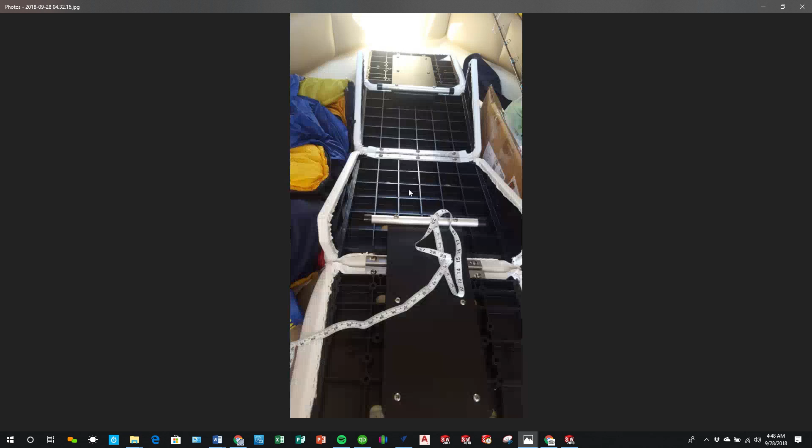So like I said, we're doing a live stream right now, trying to do a couple designs here, and thought it'd be kind of fun to show you this one that I'm working on. So it's a simple plate that I'm working on right now, but it's not just any sort of plate. I was actually contacted by someone that lives down in Marina del Rey, and on their boat, they are needing to replace, they're called Bayliner seats, and they recline and so forth, and so they wanted to get some brackets made for where the seat goes, and that's what you see here on these pictures.

And so they sent me some information on it, and I'm checking it out right now, and wanted to see if we can get a design done tonight, or I should say this morning, send it off to them and see how we're doing here.

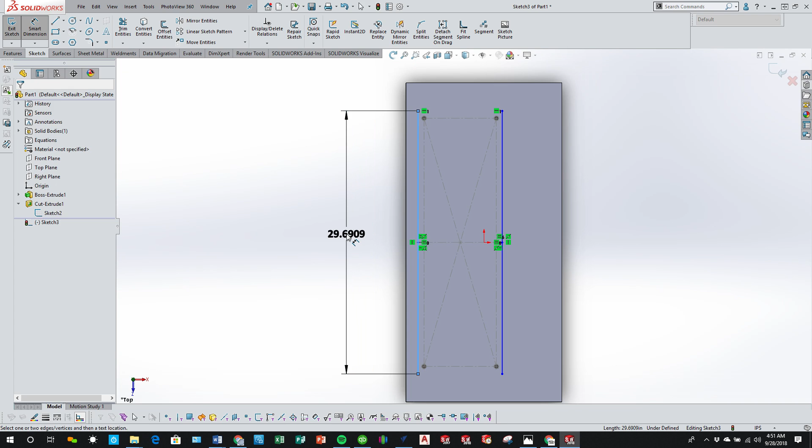So here we go. So what I did was I took that picture and kind of made my own holes on here, and what I'm in the process of doing right now is specifying that these guide rails need to be actually 30 inches, and with that, these are going to be the paths for my weldment profiles I'm going to be putting on here. It's going to be actually angle iron profiles.

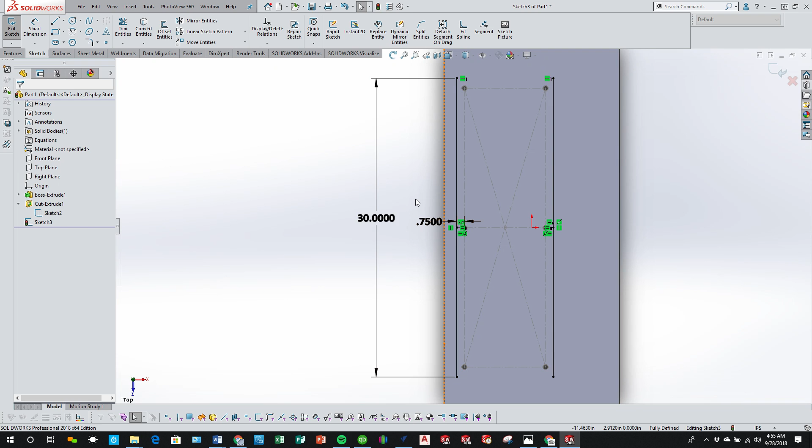So what I just did there is I made this center line and that center line equal to each other, and because I did that, I'm able to just put in a 3/4 inch dimension here, and that's going to fully define my sketch. I made those two horizontal lines based off the center of this vertical center line that was off of my cut extrude 1, and I gave it an overall distance of 30 inches. So we'll see how that works out for us, and we'll say okay to that.

So like I was saying, I want to do weldments now. And with our weldment, we're going to do a structural member. Let's do ANSI inch. And we want to do angle iron. And probably square ends. So the angle iron my client is specifying is 1.5 by 2.5. So let's see if we get something like that. There it is. Probably set up where it's 1/4 inch thick. Come in and grab that line there. That looks good. And with that, we'll say okay.

And what I'm gonna do next is just come in and I would mirror that body over, but it looks like I need to make it to where the plane that I would need to mirror about comes in the center. So before I mirror it, I need to come in and do a reference plane. I just simply click on that point there, and let's click on this face here. And what that's gonna say is, hey, make it so it's parallel to this face.

Now I could also come in and say, oh, I should probably make it so it's parallel to my right plane. That might be a better aspect to go, because if I ever come in here and change the face later, it might cause issues. As compared to doing it on my right plane, that is not going to change at all. So that's why I'm coming in and specifying right plane instead.

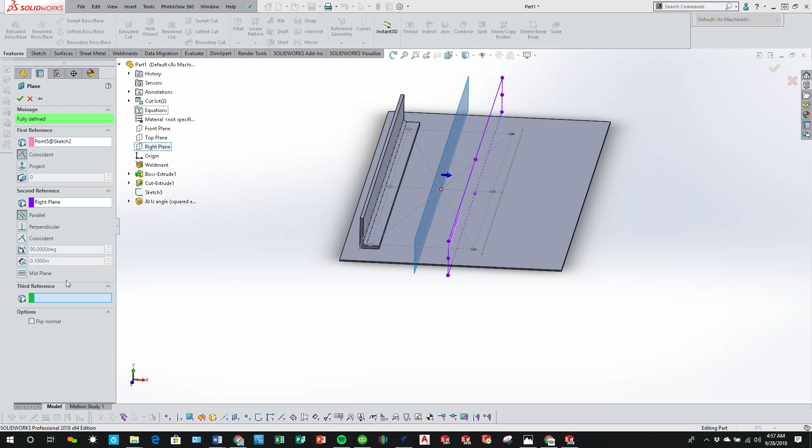Okay, so now that I got that plane there, simply come in and mirror. We'll go off of that new plane that I created, and we'll do bodies to mirror, and we'll select that body there. And we're done. Pretty cool, right? So looking at this, that looks pretty good. Not bad. So before, I just did that mirror just to verify everything.

Before I even do the mirror though, what I would want to do is come in and create holes on this angle iron. Just hang on really quick, just reviewing my notes for a second here. So I'm going to come in and do a simple cut on this, and we'll set it up to where they are slots. I might need to bump this over just a little bit more.

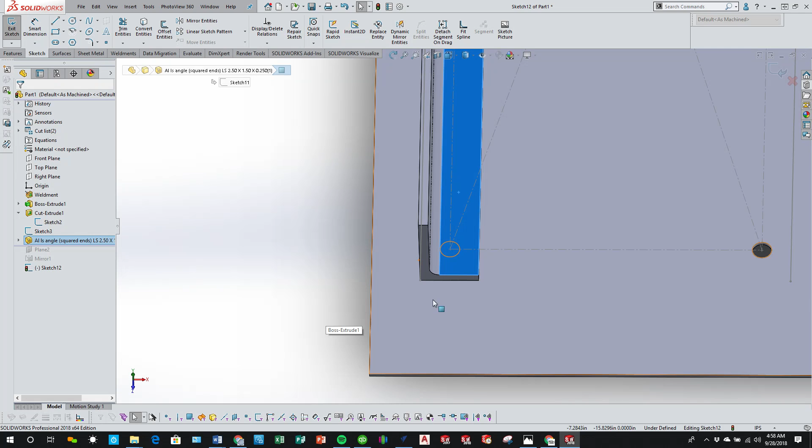Oh, that was a little loud.

My hole here, coming off from this edge here, it's 3/4 inch, and it's doing that over here as well. But I should probably bump that 3/4 inch just a little bit bigger. More likely, probably bump it up so it's 7/8 inch. There we go. It's gonna help center this over those holes a little bit easier.

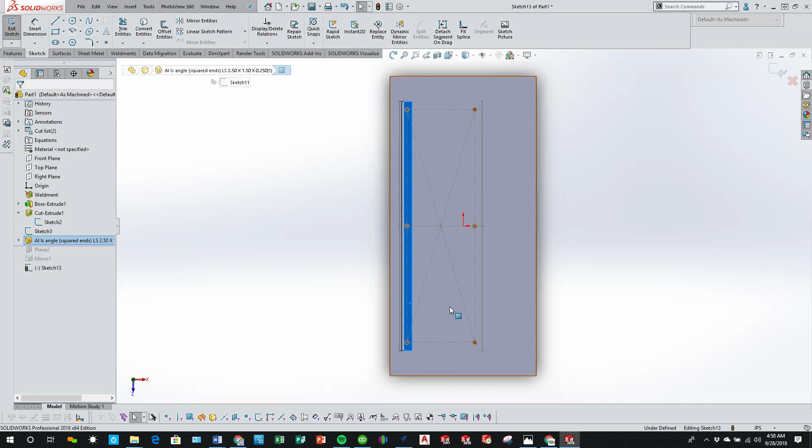And so now what I'm gonna do is come in, do a cut on this face, and we're just gonna do a simple slot. And with that slot, I'm going to come in and center it over this face here and do it kind of like that. I'm just oversizing the slots right now so that way I can come back and grab it a little bit easier.

But I'm going to come in and make every single one of these slots equal to each other. There's no need to make them different, right? So we'll just say equal slots. And size of them does not need to be that big. So what I'm going to do is simply come in, do a smart dimension, and we'll just say from there to there, we'll just make it so it's 0.75. Once again, it's just there to kind of help the assembly process.

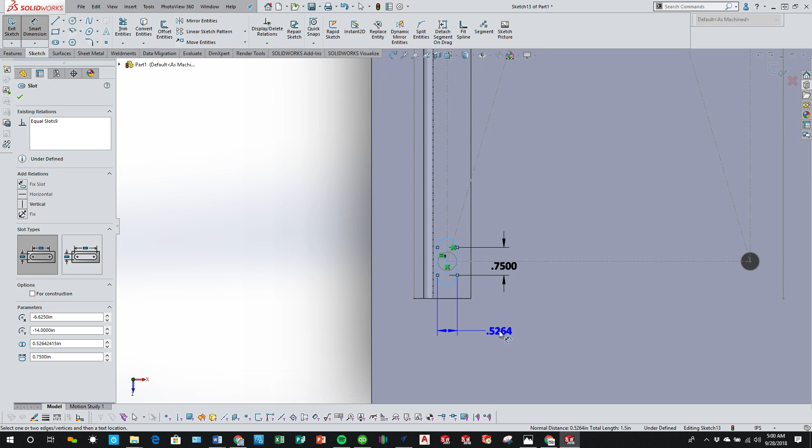Probably would be able to get away with not having to do slots, but you know, when I'm not on site and seeing what the true parameters are, and I'm working with components that I'm not seeing in person, I like to give little slots, and the client can come back and say, hey, those are a little too big, or so forth, and we can update that as needed.

So part of the fun of pulling an all-nighter designing and so forth, I am also running, like, I'm at my home office right now, and we got a tabletop 3D CNC carving machine, and currently I am running a program on that CNC machine, and it's coming through and cutting slots. It's kind of fun. We're making wooden letterboards for a company, and I got to make 120 of these, and roughly it takes about 50 minutes per board on the machine. So yeah, I gotta basically run that machine 24 hours a day to meet our deadline, because I gotta turn it in about 15 days, I want to say. And so yeah, I am so blessed and thankful for this, but man, we got our work cut out for us right now.

All right, so going back to this, what I wanted to do is say 0.5 plus 1/32. Okay. So now all these slots are fully defined. So remember, I did that mirror function first, right? I'm sorry, before I get into going back into that mirror, what we're gonna do next is we're gonna do cut through all. Now, you might be thinking, well, if you cut through all, it's gonna cut through this bottom plate, right?

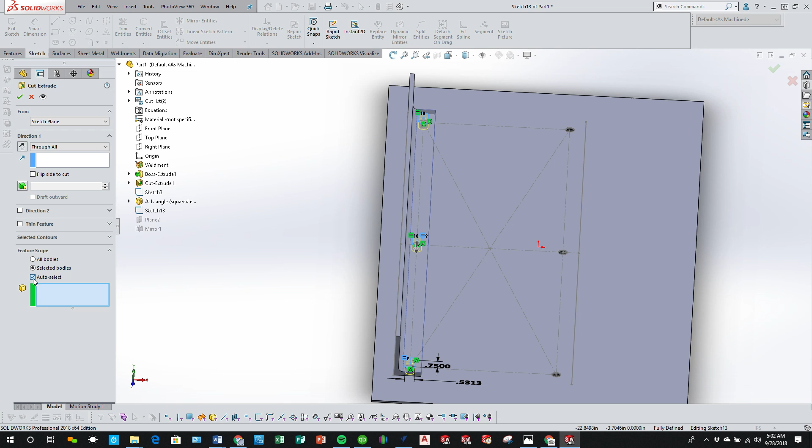And part of the reason for that is something like this. I want to have these slots, and I want to have them cut through this angle iron, but not this bottom plate. So whenever you have multi-body design, you have feature scope. And within feature scope, you could come in and say, hey, I just want to cut through that body alone and nothing else. And so when I say okay to that, and I'm saying through all right now. So when I do that, you'll still see, oh, look at that. It only cut through this one body. So that's what I generally like to do.

All right, so now that we got that, check out what happens when I go back to my mirror function. So I'll bring in my plane again, bring up mirror. Because I put the cut before the mirror, it now includes that. Because whenever you mirror bodies, it includes everything that's a part of that body.

So if you're not totally familiar with the strategy of how SolidWorks goes, you have a sketch. So you always start off with a sketch, no matter what. That sketch then gets absorbed into the feature. And features come in together and make up bodies. And those bodies can then make up the part file. And so that's kind of how the structure of SolidWorks goes, and that's how the design tree can also help you out as well. So because I got it set up with multi-bodies, you'll see also I have a cut list because I applied a weldments function. So now that we got that set up, it's looking pretty good, not bad.

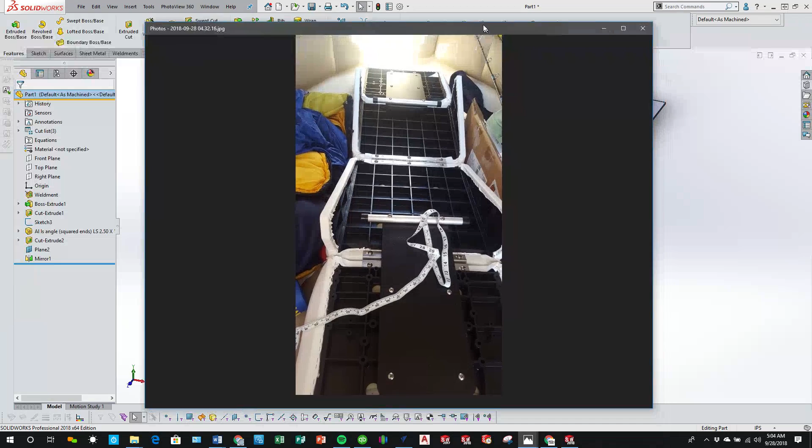So the next thing that I need to do is come in and make it so that, I'll pull the picture over here so you guys can see it again. So the type of seat that's gonna sit on this, it's a seat by Wise. They're just called Wise, and so they make seats for like marine applications, golf carts, industrial applications. So this given seat is actually a Wise Bayliner Capri series. And so what it is, it's a back-to-back lounge recliner seat. And so I'll just show you on their website right here.

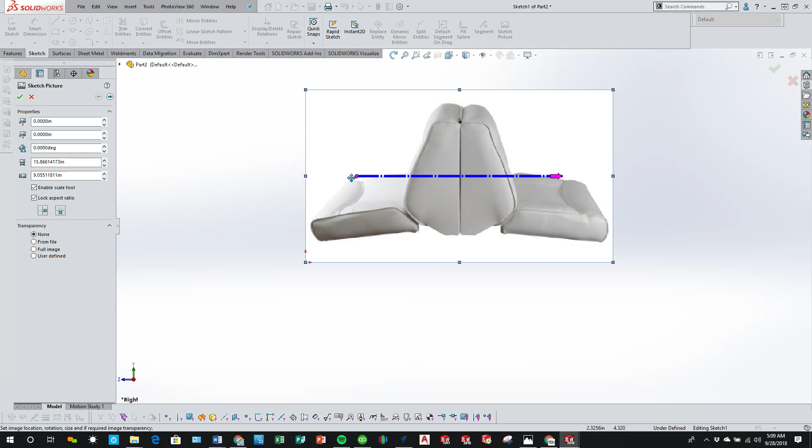So on their website, they say that the height of this is 19 inches, width is 20, and depth is 46. So seating depth is also 16. So I'm gathering that from here to there, 16. But what I want to look at is our height. So I'm going to say from here, and we'll say vertically up to there, and we'll call that out at 19 inches.

So what I just utilized was my enable scale tool, and what that does is it will take a line there, and you can rotate your image if you want to, but what it is, I took it to the bottom, brought it up to the top, and said make that line 19 inches. Pretty cool, right? So I'll come in here, I'll just make it so that this is about centered and say okay to that.

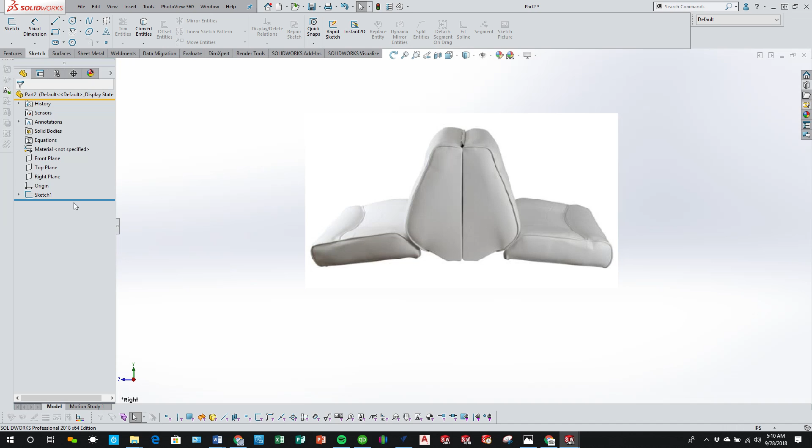All right, so what I want to do next is come in and trace this and make my first seat cushion. Okay, so whenever I do sketch picture, I always do that in a separate sketch feature than my actual extrusion. So now that I have that sketch done, I'm going to come in on my right plane again, create a new sketch, and I'm not going to be very accurate with it. I'm just going to come in and say from there to there. You know what, we'll do it this way. I'm still thinking as I'm going through it.

Now I'm looking at this going, you know what? We need to make this into a true assembly file. So what I'm going to do is make this the back one part file, and make this another part file. So we'll do that. I'm just kind of getting it close. My biggest thing that I needed was make this so it's 19 inches, like that. Cool. All right, so now we'll come in and trim this. We'll do power trim application.

See how my machine's going. So it's almost done. Oh, I'll wait till that's my end line when it comes over that way. So it's not done yet. It's probably got a couple more passes to go.

Okay, so now we have that. I'll just go in and fully define this. We'll say that that's at 4. And I just heard my machine die down, so that means that it is done. So that's at 4. We'll say that this guy here is at 14. And this one will be at 5. Great. But we're still not fully defined. Why is that? It's because of this line up here. We'll call that out at 4.5. Cool. So now we got that.

I'm just going to take that sketch and do a feature, boss extrude, and we'll do a mid-plane application. And with that mid-plane, the width of it is 20. So we'll just say 20 on that, mid-plane, done. Cool. So now that I have that, click save. And I'm saving this over onto my other screen for a second here, as you hear me clicking away. All right.

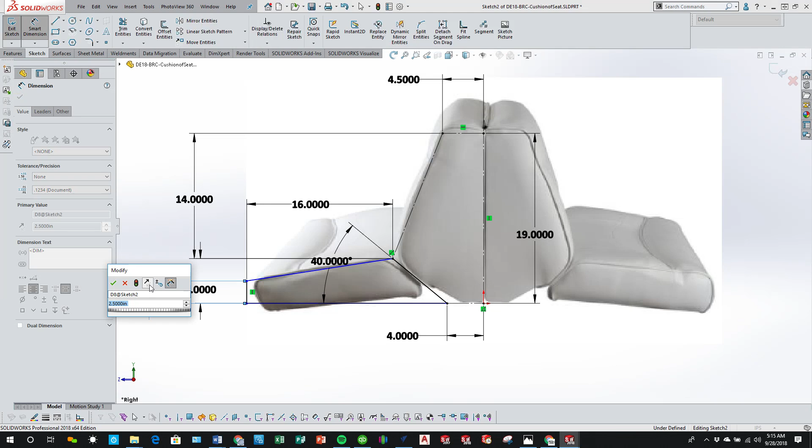I believe that this was 16, the seating depth. So let's see what that looks like. Looks like that. All right, and we'll give it a little more thickness in that. It's probably more at the 2.5-inch thickness, and we'll tell it to be horizontal. Yeah, once again, it's blocky. It's just meant for representation of the seat cushions. So we'll say that it looks good, and we will simply click save on that.

And I'm going to hide this picture. Great. So Control Tab to go back to my original one. We'll hide that one too. And now what I'm going to do is save this. We'll come in and do a new assembly here. So I'm going to actually go off of my seat cushion, make assembly from part, like so. We'll say cushion of seat, and we will lock that one in place. Now what we want to do is assembly and insert my next component in the back of seat. So because I did a save as copy, these guys are identical right now.

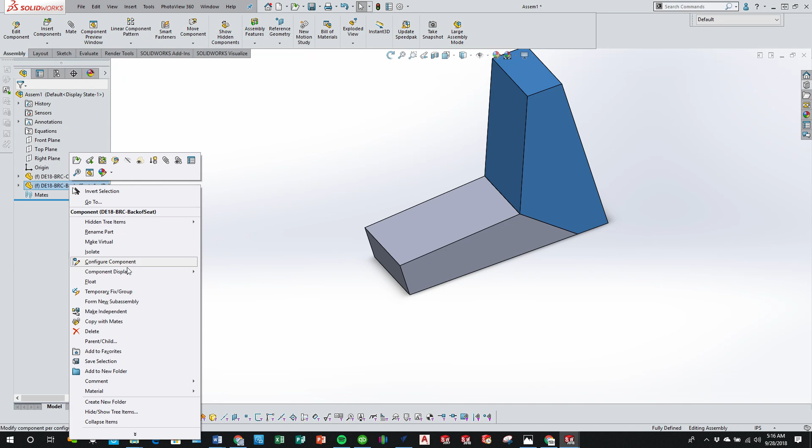Now what I want to do is make it so that this is, not flexible, but make it so that I can rotate it. So I want to make it so it can float. So I want to make it so that my right plane and right plane are coincident, but I still want this guy to be able to pivot, right? So what I want to do now is come in and say that this edge and this edge are coincident to each other, like that. Now what I can do is take this and flatten it out.

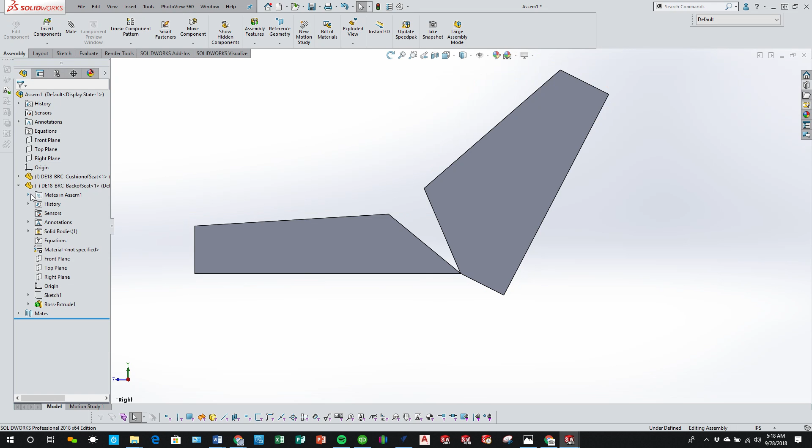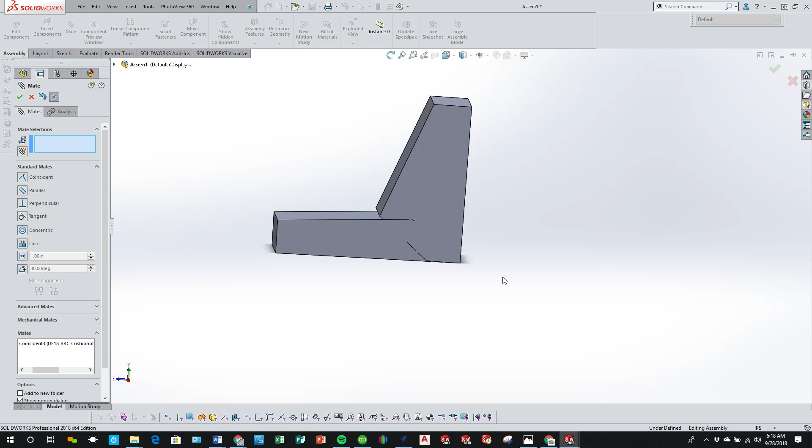So what we'll do is we'll come in, we'll make these two coincident, like that. And when it comes up, that should technically be vertical, like so. Okay, it should work. All right, so now I'll just simply take this, take it over, flip it over, and make these two guys coincident, because that's our hinge point. And we'll make my right plane and right plane also coincident. So now we can see that these guys are going to be coming out, and as this comes down, should be pretty good.

So now I want to check this one out. I want to take that, copy it over, flip it around like so, and same sort of application. I'm going to take this edge here and make it coincident to this edge here, like so. Yep. And we'll come in and we'll take our right plane.

Just realized our music died. Let's do that.

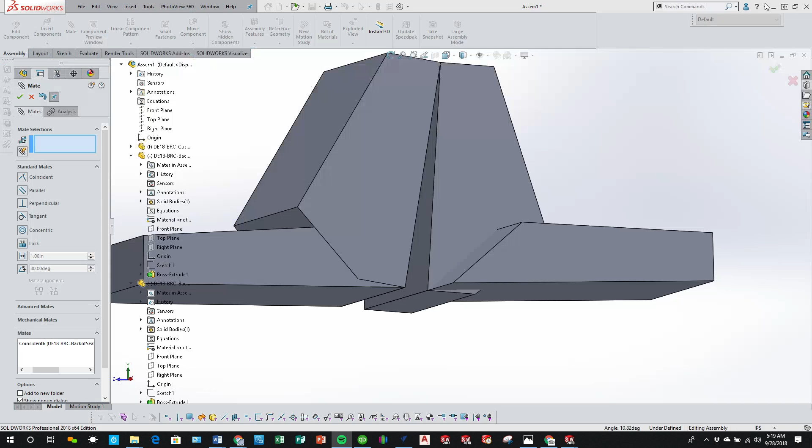So now that we got that set up, I want to take my right plane of this guy and the right plane of my assembly and make those two coincident. But then I want to take this face and this face and make them coincident as well, but you saw how it kind of just freaked out. Not a big deal. So as this flattens out, we'll be making it kind of like that.

And so what I could do next actually is come in and do another mate. Let's do a mechanical mate, or sorry, not a mechanical, we want to do an advanced mate. And we want to do a max and minimum angle between these two faces here, this face and that face. So we want our minimum to be 0, like that. But we want our maximum to be 180. So let's see what that could do for us.

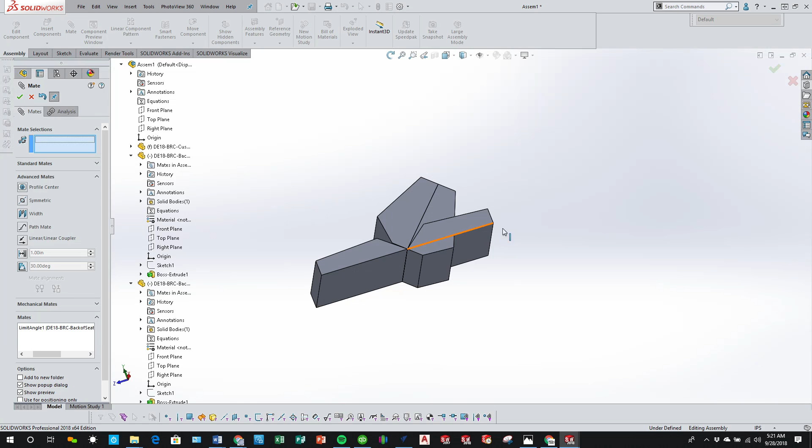There we go. Whoop. So it's a little mad, but maybe we can make this work. Maybe.

There we go. It's being silly. Once again, I don't care that they don't technically look like seats. It's just for physical representation.

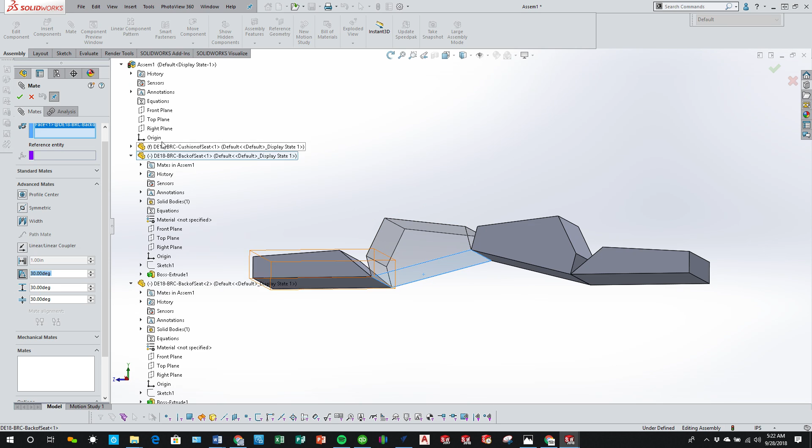Okay, so now that we have that, this guy is going to be a little interesting. Be cool if there was a way to make it to where I'm just looking at how the movement of it is. Seeing if there's a way. Let's see, maybe I could come in, do a mechanical advanced mate, and do a max min angle between this guy and the top plane.

And what that will do is say the max is 90, and the min is 0.

Maybe. I wonder if it's due to this other mate, that one there. So let's suppress that.

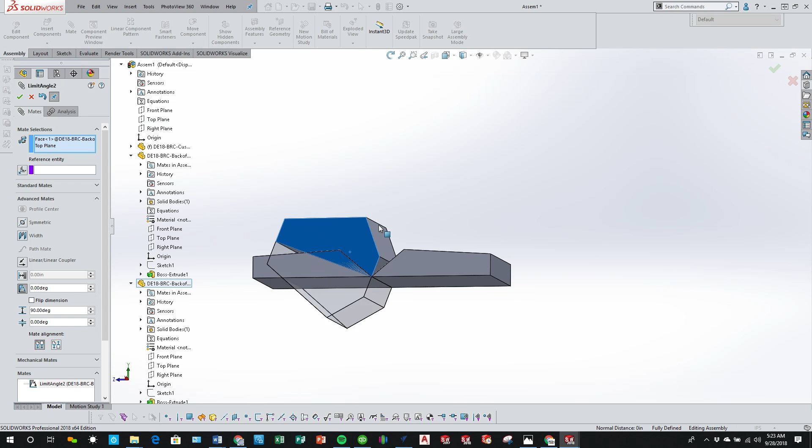Just trying to see if there's a way to make it to where that'll work for me. You know, so that's always a fun thing. Yeah, sure. I'm weird, I enjoy this sort of stuff, trying to make it function as I would think of it to function, even though it is not. So let's do it.

Let's flip it. Let's say 0, and the minimum's 90. Nope, that's not gonna do it.

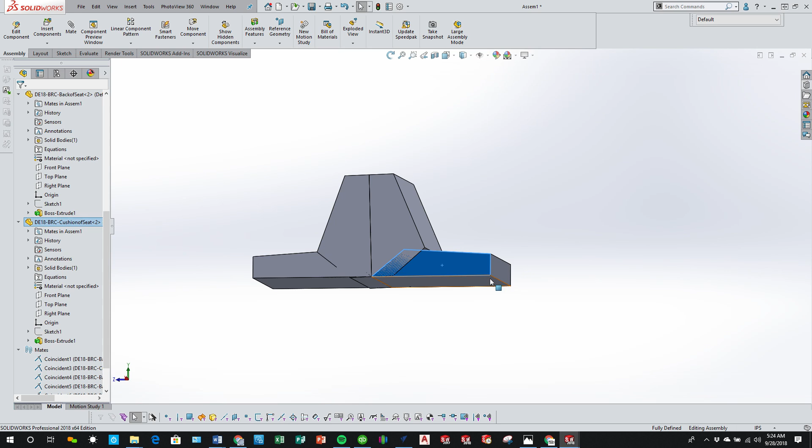It's just gonna be a little funky. So what I'm gonna do instead is add a configuration. I'll say folded. Add another configuration and say extended. So here's our folded and extended ranges.

Folded range is gonna be like this. We'll delete that. Yes, so I want to come in and make it to where this face and this face are going to be perpendicular. So that's how it is in the folded state.

I'll just need to come in and unsuppress that, or suppress it. Unsuppress it, and then I want to go to extended, go to mates, and we will suppress it this time. And now what I'm going to do is say make this face and this face parallel. So now check this out.

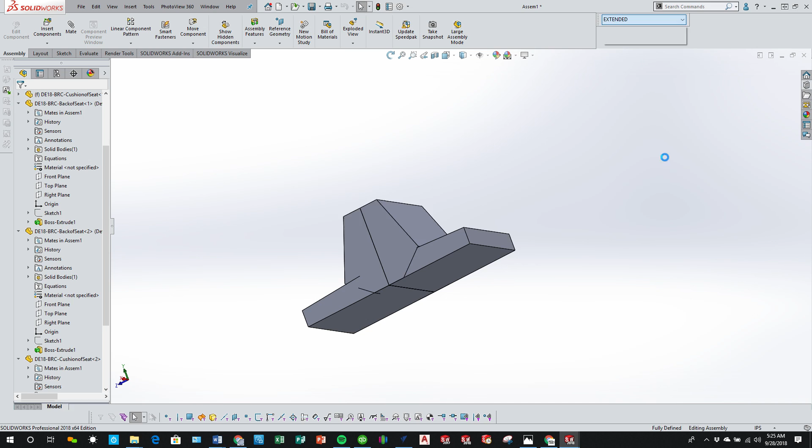I added a configuration toolbar here, and so I could go to folded state and then go to extended state. Done. Okay, so now that we have that, we'll simply click save on that, and we'll just call this guy...

Cool, so I just saved this as a sub-assembly, so what it's actually gonna be, because what I want to do is come into my part file here, and we'll save this out next. Sorry, excuse me.

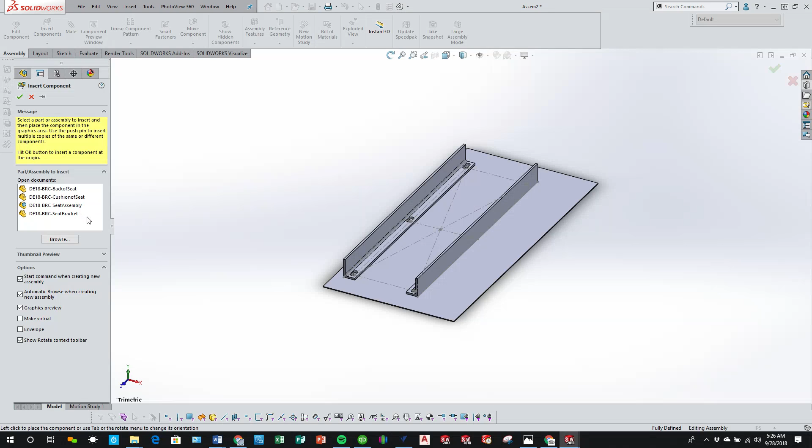Okay, so the seat bracket, now we'll come back over here to file, and we will make an assembly from this. Okay, so make assembly from part, that assembly right there. Cool, we'll just drop this guy in and make it so it's fixed. And now what we're gonna do is insert my seat assembly.

Wow, all right, so these seats are obviously quite a bit wider. So what I want to do is take this face and that face, that face, and that face, and say make a width mate.

And what I want to do next is come in, add a configuration, and we're going to call this one extended. Add another configuration and call this one folded.

And the reason why I called it this way is because I called that on my subassembly. And I always recommend keeping your naming structure the same if you're going to be doing configurations with assemblies. It just makes it so much easier.

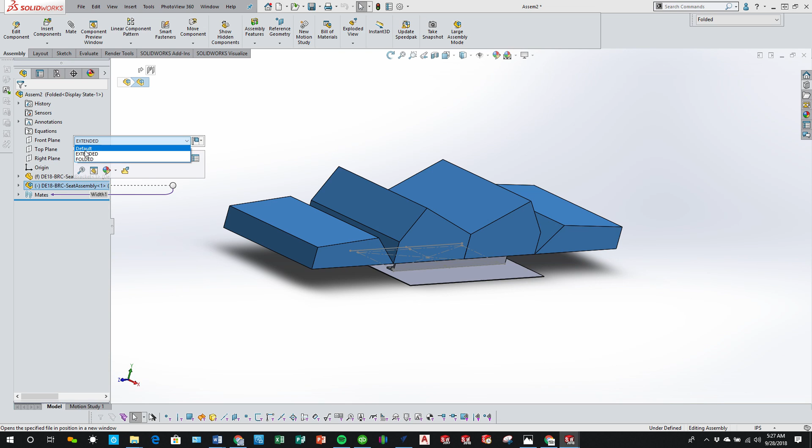So now when I come in here, I see my extended is now set up, but I'm under my folded configuration of my main assembly. So I'm going to switch that to folded. So now when I switch from folded to extended, it matches to what my subassembly is as well.

Pretty cool, right? I know. Okay, so with that, we'll just take this. So I made it so where it's centered about my plate here. Now, one of these are going to be locked. And let's see which one that is going to be though.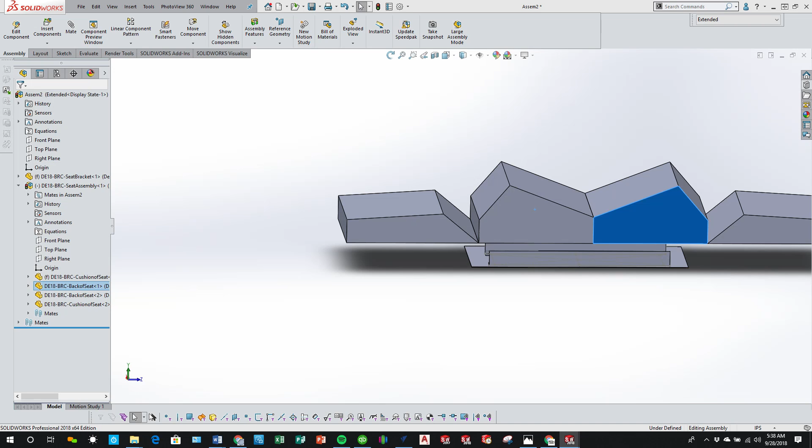I am still here, just processing this, trying to figure out. Maybe, almost looks like both seats can actually slide out. That's very interesting. So looking at this, it's almost as if I need to figure out where these rods sit. Let's see here.

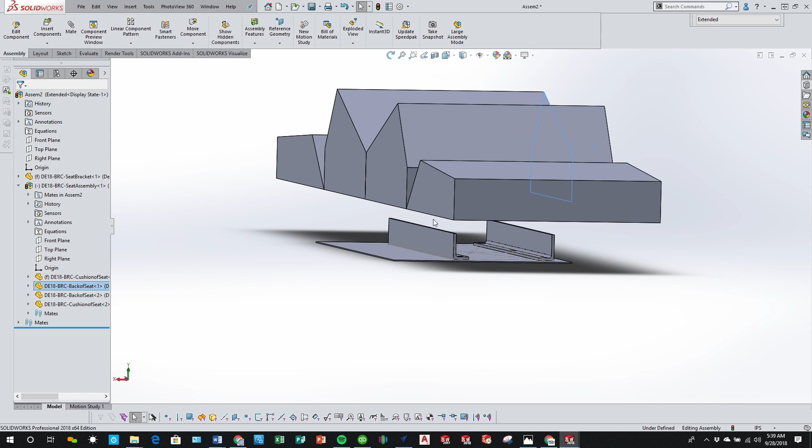I'm almost thinking that we need to come in and put in another L rail up here and over, make it probably 2x3, give or take. They told me here that the rods are 1 inch diameter, 11 3/4 inch wide.

So let's come back to our normal part file here. What they're saying is, when a seat is in a folded state, the rods that go across are 3.5 inches apart from each other, and 27.5 when it's in a flat state. I'm talking about those rods that went across. So let's just go off of this here, and let's say we come off of our...

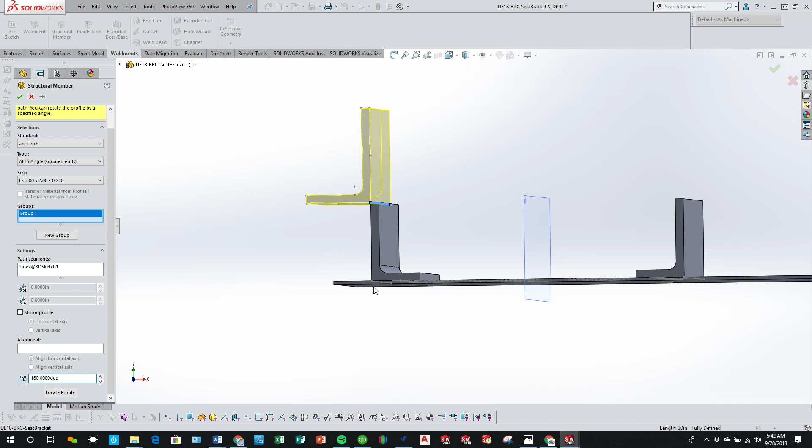One of the things I'm thinking through is send it up to where, probably not on this, but create a larger rail and come on this here and say, alright, it needs to be where they are 27.5 inches open and 3.5 closed. So create a stop here that's 27.5 inches from side to side, and another one that's 3.5 from each other.

So what I'm kind of thinking here is we, almost, I don't like the idea of doing an angle iron and bolting another angle iron on it. The other option that I would do is a C channel, and with a C channel come in and we'll say C36.

Let's see what that looks like. Yeah, but that's not the type of C channel I was hoping for. Yeah, it's a T channel. Don't want that.

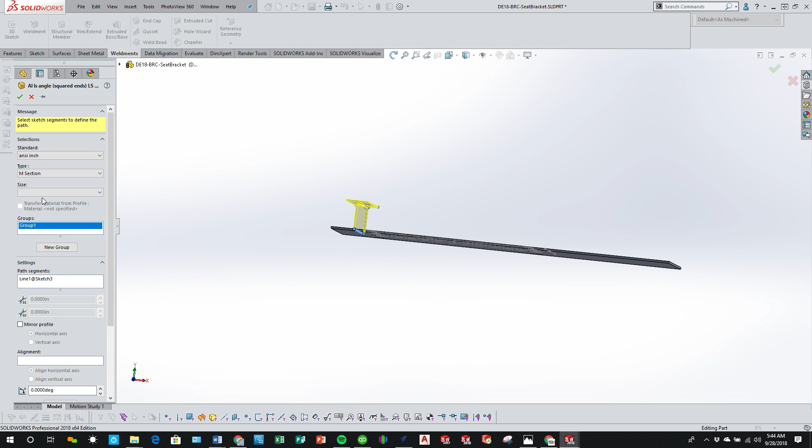Yeah, these sort of channels are way too, way too robust. It's a little bit better.

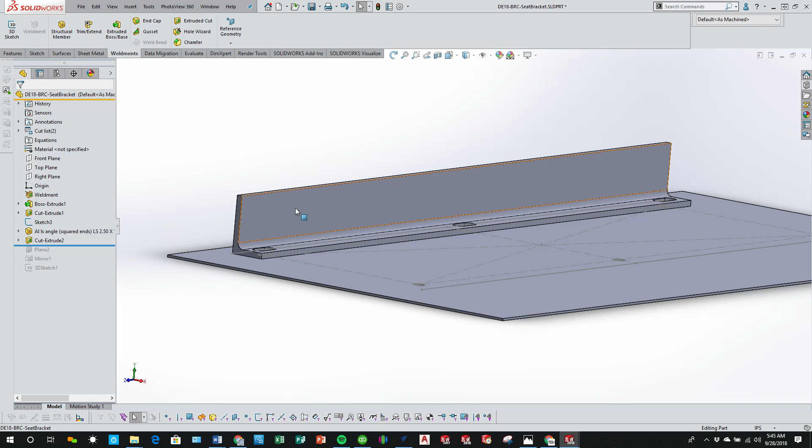Guess the other option that I come in, like how they want it on their notes: 90 degrees, 2 inches by 3 inches tall. So if we go at that rate, what I'm going to do is this: we'll come off this face here.

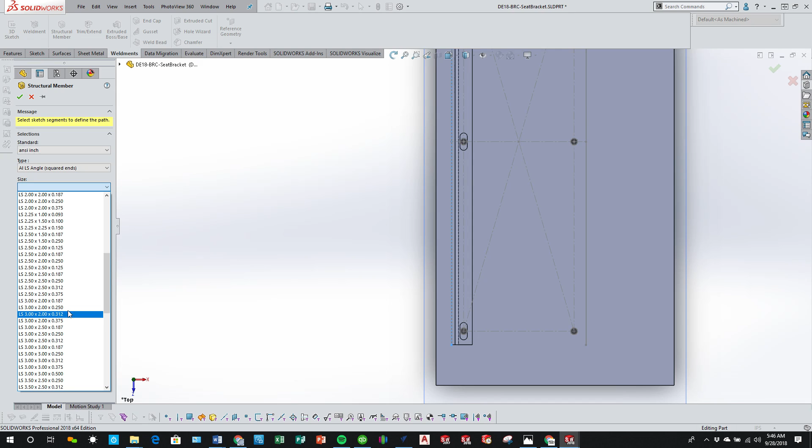Let's see here. I'm probably gonna have to offset that line, but let's see if I can actually move it around or not. Yeah, more likely I'm gonna have to do that, but let's see here. Yep, so let's do this.

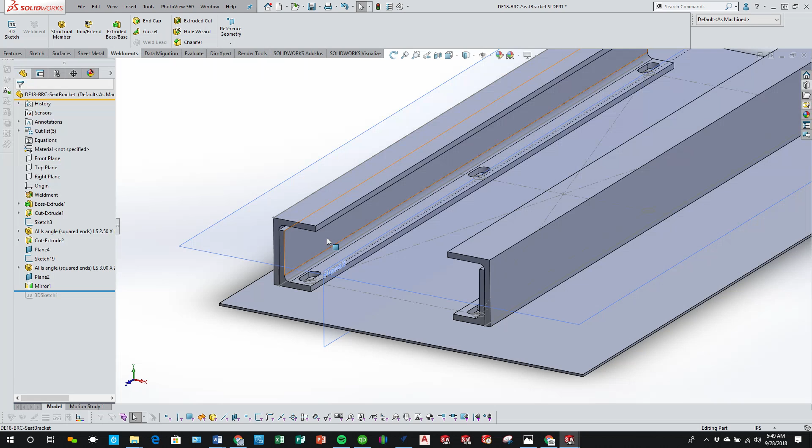So we know our two measurements are at 3.5 inches and also at 27.5 inches. So what I'm gonna do this time is, before doing my mirror again, come in and more likely I'm gonna come in and cut these out. So let's see.

So I'm going to come in and do a centerline application, making it centered about the part. What that's going to allow me to do is, when I come in and smart dimension this, if I select the center line and move to the right, SolidWorks will automatically do the double of its dimension. So that would be 3.5. And then I do that again here, and this time it'll be 27.5.

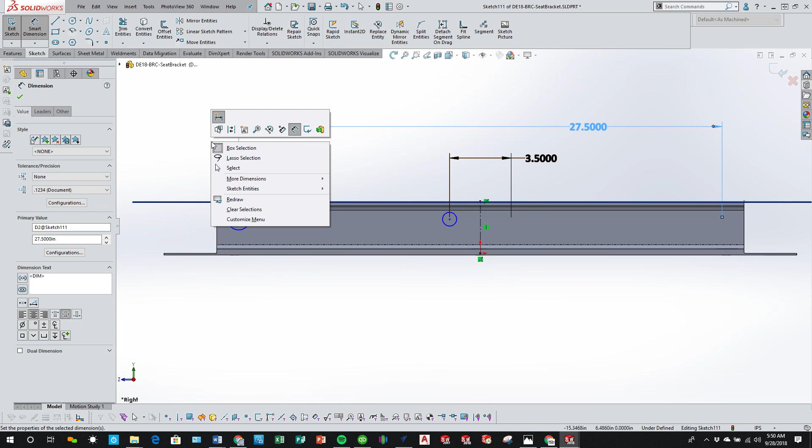Okay, so now what we want to do is take these two guys, make them equal, and with that equal dimension, the rod's about 1 inch in diameter, so we'll just come in at 1.0325, so let's bump it up a 32nd of an inch. Now...

One thing I'm working through here is, do we come in and cut this, and do they want to make it to where they have to pick it up, slide it out, and then drop it back down?

So there's a couple ways that we could go about this, actually. What I do want to do, though, is come in and, looking at the pictures on this, I'm not sure how much further down these bars are to the seat.

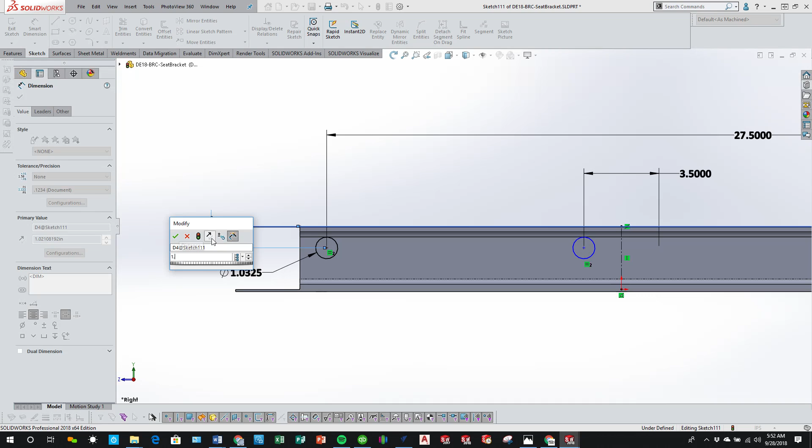So to see how far down I should make these holes, we'll just come off here for right now and say, make it come down 1.5 inches. And I want to come in and make these two horizontal, like that.

So now these are fully defined, and I can mirror these two holes onto the other side through my sketch or via 3D model. In this application, I'll just do it inside the sketch. Grab those two circles, I had that construction line, and there we go. So now we have that.

We say, okay, let's cut through all. And this time with through all, I want it to go through both bodies. I want to say all bodies because it's not going to hit this bottom plate at all.

So now the next aspect to look at is, do we want to make it to where it's a slot that comes down on each area, and that way you pick up the seat, pick it up out of its slot, slide it down, and you drop it? I'm wondering if that's ultimately what they would like, or would it be better to come at an angle, so that when you're doing this, then you slide it down.

That way, you know, this is for a boat that's out on the ocean, you gotta deal with waves, and so I'm wondering if we make it to where the slot goes out like this, comes over, and then comes down. We can see what they have to say about that. I think that way will work, kind of doing an angled aspect there.

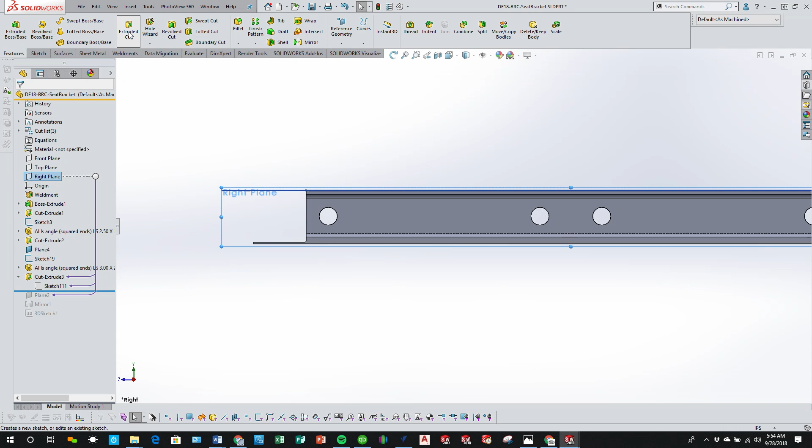So we'll come back in, we'll edit our sketch here, and what I want to do... you know what, we'll make a new sketch and we'll just come in and cut in case they want to change how the grooves are for the rods to flow into.

So what I'm gonna do is simply do a slot command, and we'll do center point style, and we'll come off. Oops, I want to do that one. Come off, and we'll just come off at an angle, like so.

I'll make this guy and this guy concentric, or actually co-radial, and with that, we'll say coming down at, we'll say 45 degrees, and then repeat that on every single hole.

So we come in here, slot, do that same style slot again. And I could come in and say, hey, make these two guys equal to each other, equal slots, and make it to where these two lines are also perpendicular, because it's come off at 45 degrees.

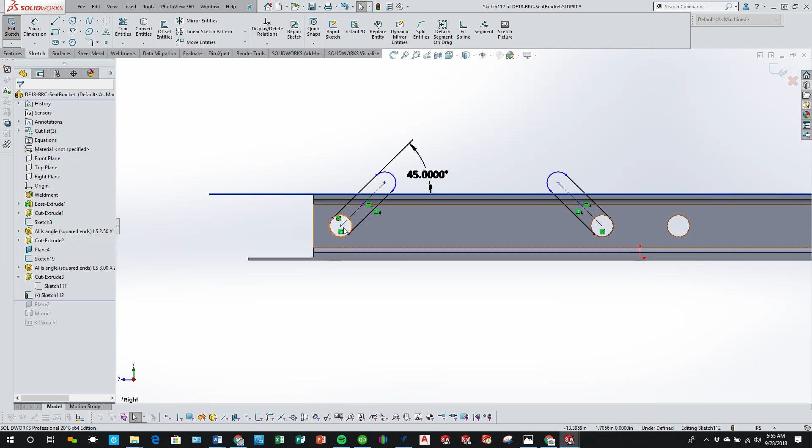So my reasoning for this is you pull out the rod, it comes up, you slide it down and it hits the next spot, and then it will slide down into its next catch hold. And what's kind of cool about going at an angle like this is the boat, as it goes on over waves and stuff, it could get a vertical jostle on it.

But now by going at an angle, it's gonna have to go up, and as it hits its top edge, it's gonna try to push it in and should make it so it's a little more rigid.

Hang on again. All right, so we'll come in now and we'll make these two guys horizontal. Oh, not horizontal. I want to fully define this.

Let's say that goes up half an inch above it at all times. So kind of like that is what I'm thinking. We'll see what that could do for us.

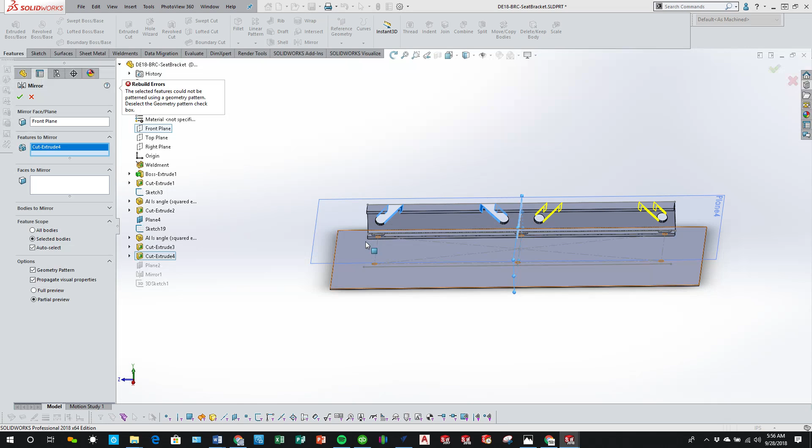So in this application, I'm just gonna mirror it over because I didn't have a center line there. So mirror plane, we want to just go off of our front plane there. Features this time, I just want to mirror that feature over. All right, full preview.

Selected feature cannot be patterned using geometry pattern. Deselect. Okay. Huh. Not a big deal, we'll just do this.

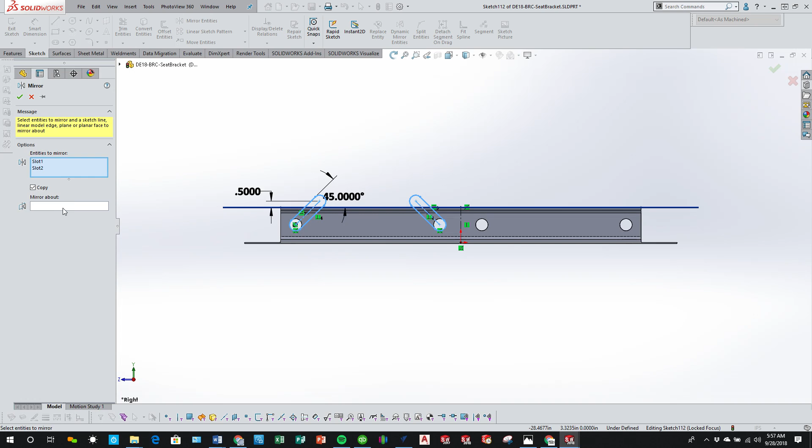We'll go back into the sketch and I will mirror it over. So we'll just simply do a center line, go from here up to the top. And then with that, we just simply do a mirror function within the sketch. Entities are those guys minus the line, and we want to mirror about the center line.

There we go, I'll just cut through all. Cool, not a big deal.

So now the next thing is do the mirror function, and we should be done. What we will need to do is come in with holes that will bolt onto each one. Let me just review my notes again here.

So because I made these slots equal to these holes, all I need to do is come in here and say, you know what, let's make this hole a little bit larger, 1.125. Do a Control Q. It's gonna update my slots and everything. Pretty cool.

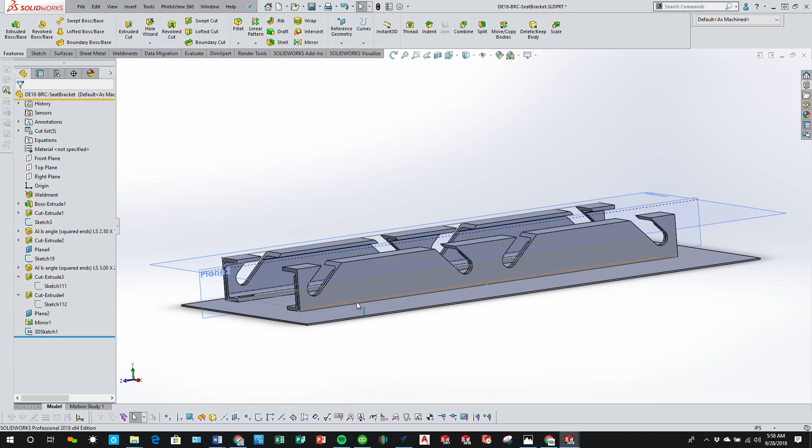Okay, so now what I'm gonna do is come back before the mirror, and what we're gonna do is come in and do simple holes here as well. So do cut extrude, and I know I could be using Hole Wizard. I'm just not at this time, but I think I will now.

Sorry. I am a little tired right now. Let's see here. Our machine is still running just fine.

So let's go on to this face here. We'll do Hole Wizard. And what we're gonna do is a clearance hole, just standard hole there. And what we wanna do is make it so that it is, we'll just do fractional sizes, and we'll set up so that 3/8 bolt, so we'll say 13/32 hole, and we'll say through all and position.

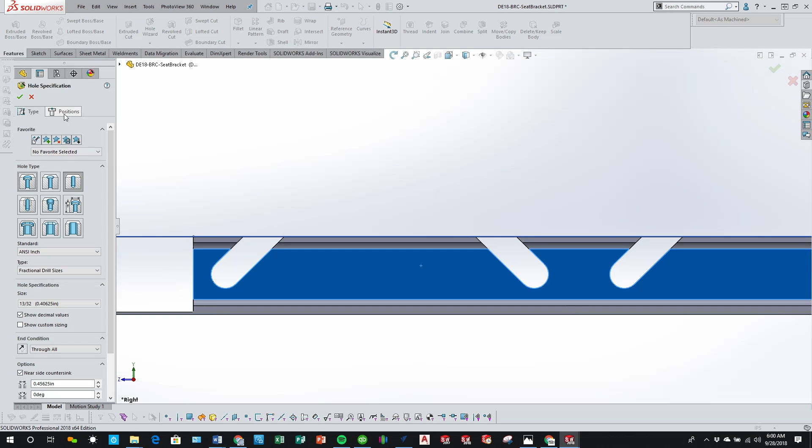What I'm gonna do is simply come in and we'll make it so it's a square pattern. So coming in here, we'll just do square. Drop points on each corner there. Have to delete that one in the middle though.

Okay, and we'll just come in and make it so that this is going to be about 4 inches by, we'll say 1.75. Too much. Cool. And we'll just come in, do center line from the center of this face. Make these guys horizontal. And so with that, we're saying, okay, that looks good. But the next thing is I want to say how far off from these edges are these. We'll just say it comes in at 5 inches.

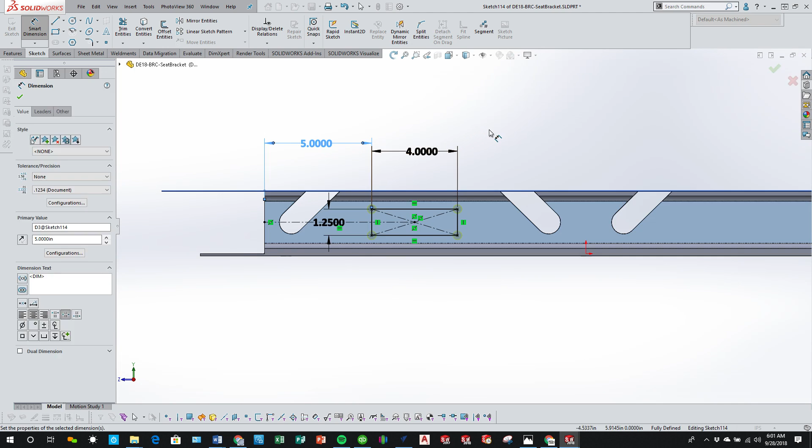Now we'll do another center line. And we can simply mirror all these entities and mirror it about that. Fully defined. Need to drop some points on there, I guess. Not a big deal. There we go. So now we got holes that are lined up on each other. Should work pretty well. Now we'll come back into our mirror function, and now we're done.

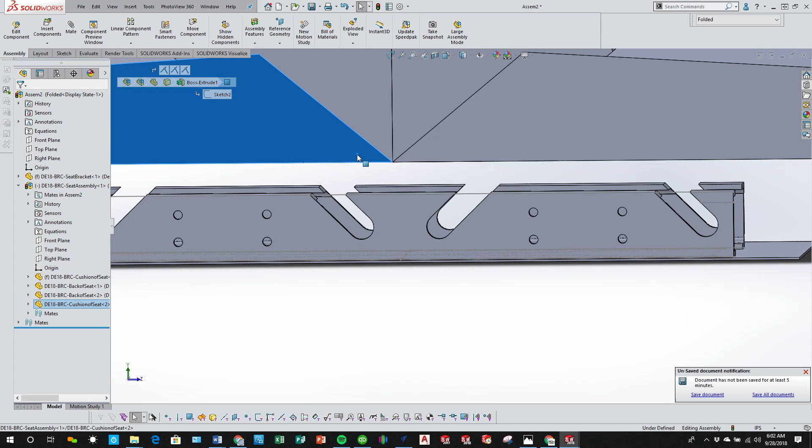So like I was saying, the purpose of these holes and slots like that is due to the fact that the boat is gonna go like this a lot. And instead of having this going straight up and down, because that will happen, being able to come in and say go at an angle as this comes up, you know, if it hits a wave, it's gonna have another angle to say, hey, let's not just go straight up, let's push out, and that's gonna cause this to not pop out as easily. So hopefully that will solve the issue for them.

Once again, I'm not sure how far down these should go or are able to go. So I don't know how far down those rods are in reality. So we'll simply save this and we'll do save all. Yep, rebuild and save document. Let's hop it over to my other screen.

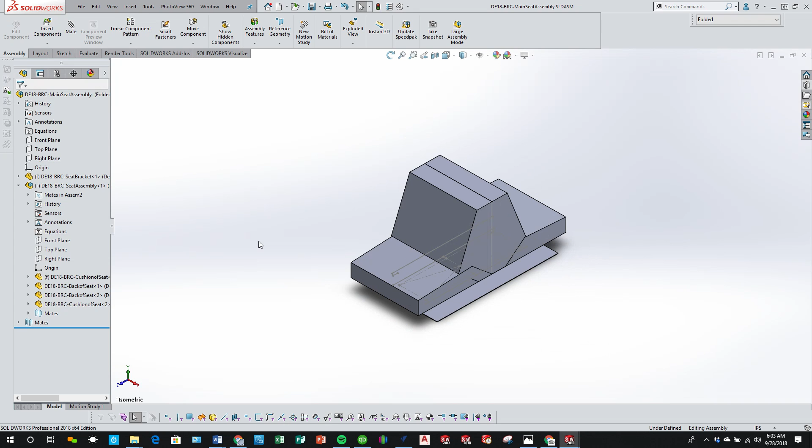Cool. All right, so now we'll just come back to the part file here. I'm gonna hide some things. We're also gonna hide that. We'll project off of this. Okay, so I'll just come in here and hide these sketches really quick. Let's do that here as well.

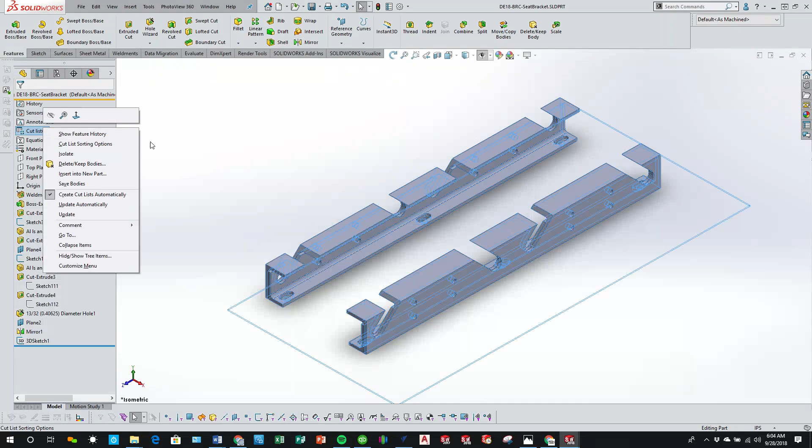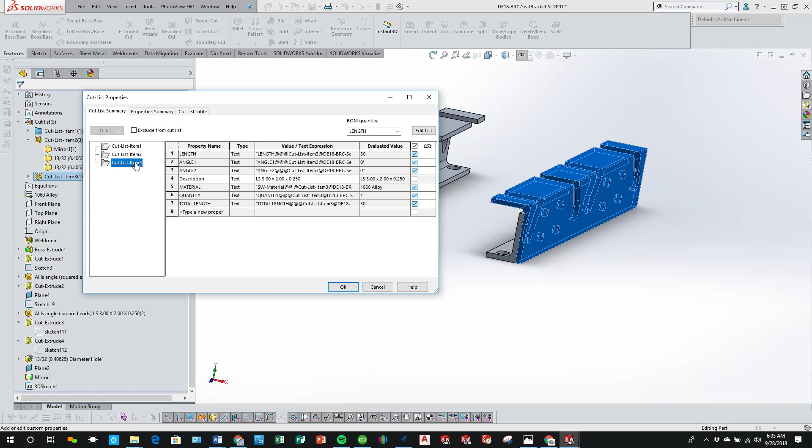Okay. So now what I'm going to do is go back to my part file since this is a weldment. More likely it's going to be made out of aluminum. So we'll just say 1060 alloy on it. Control Q. Say update automatically. Come in here and edit my units here. So we'll just see these two guys here. Interesting. Technically, this should be a different... I don't know why it's including that. I think SolidWorks is being drunk.

Technically, this guy and this guy should be the same. This one and this one should be the same. Not totally sure what's happening here to make it not function properly.

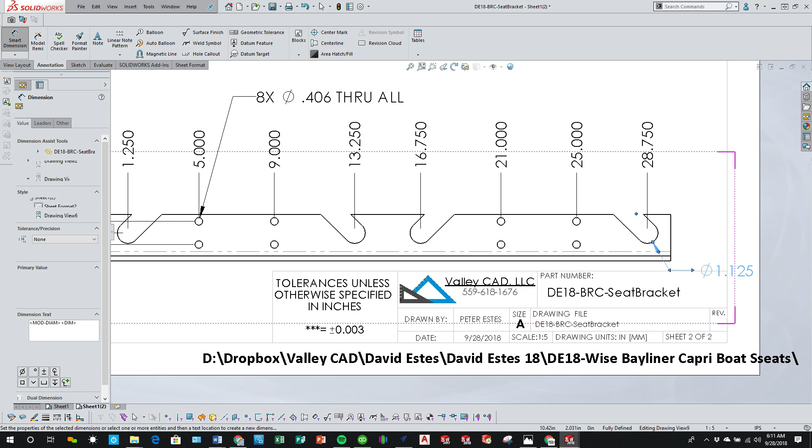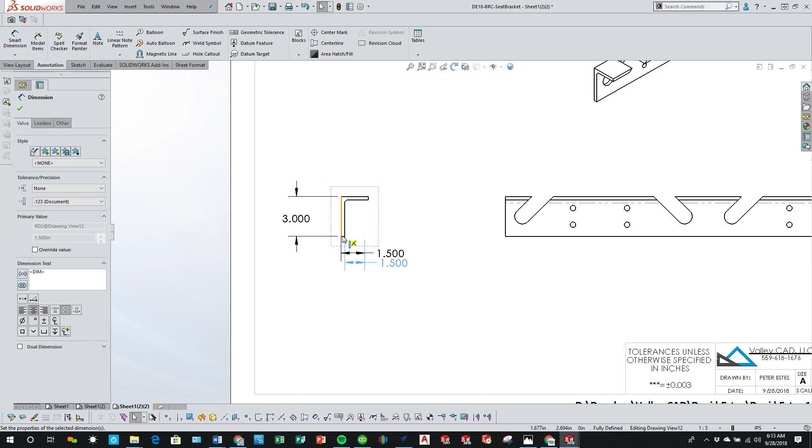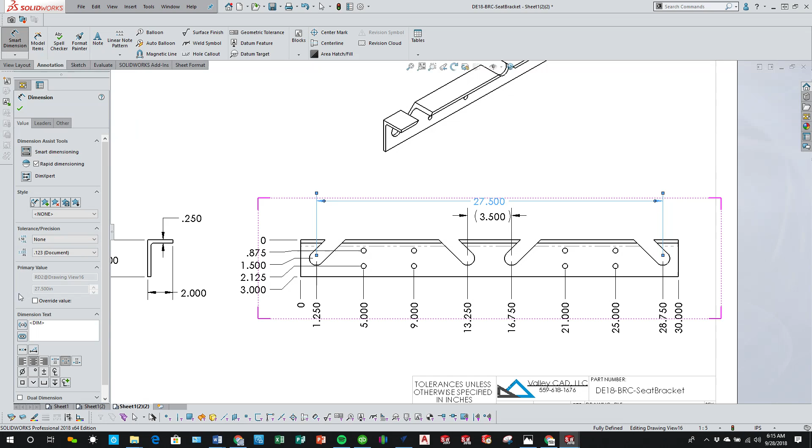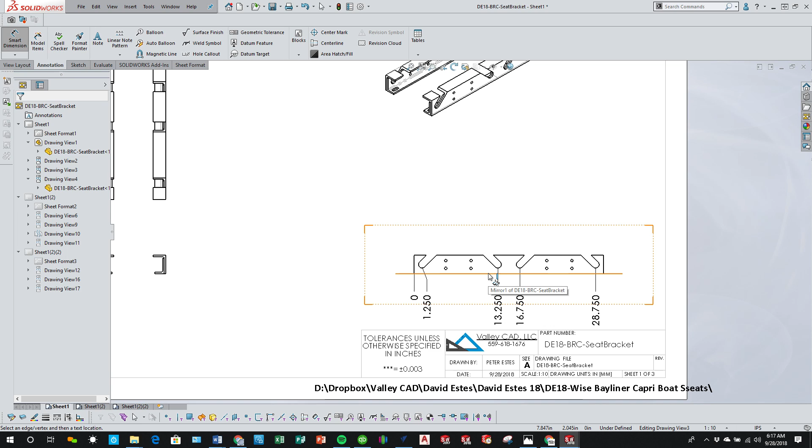Still awake here. Silly SolidWorks. Oops.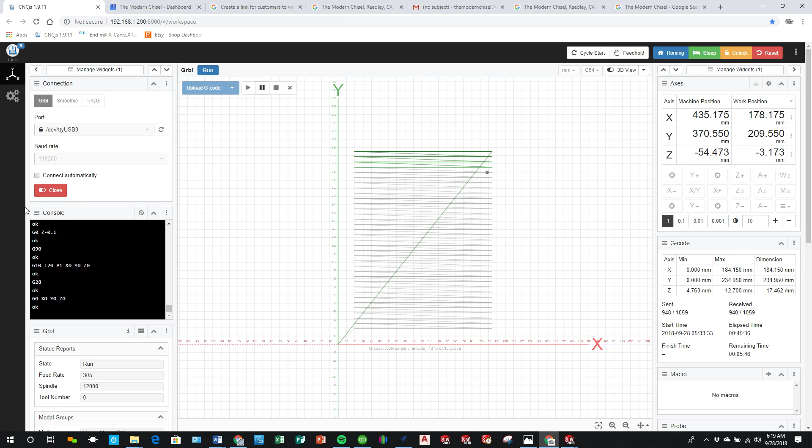I'm sorry, I'm falling asleep here at the computer right now. Probably gonna have to call it quits here and go take an hour power nap. And let's see how our machine's looking here. This should be done in the next 5-10 minutes. That's good. So I'm probably gonna end our little live stream right now.

Got the design done. Send it off to the client, see what they have to say, see if they want us to change anything on it, and we'll go from there.